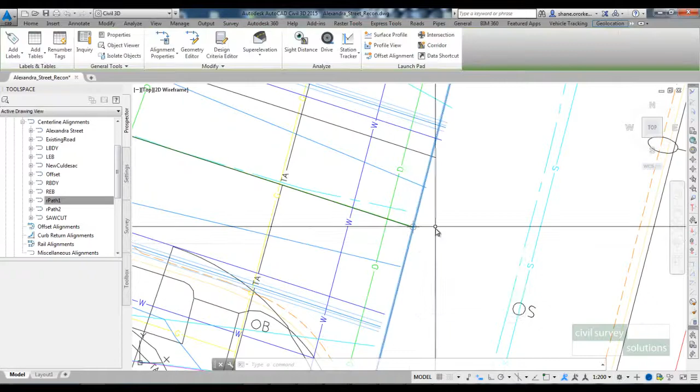The next thing I'm going to do is tie Alexandra Street back into this existing road. I won't be reconstructing the existing road, but we will tie back in at the curb returns. What I've done is I've created an alignment that runs along the edge of the existing road, and I've called this alignment existing road. You'll notice in the description I've got an R dash there. I'm actually going to treat this as a road object, and the reason for that is I'll be able to use the auto curb return command to form the curb returns for me.

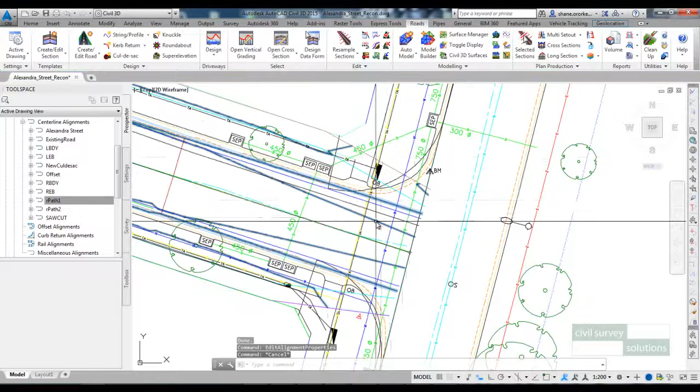First thing I'm going to do is open up the template editor, and I'm going to create a new template, and I'm going to call this one existing. I'm going to select on create section and add an LEB and an REB code, which will just be, at this stage, just a centimeter off the center line.

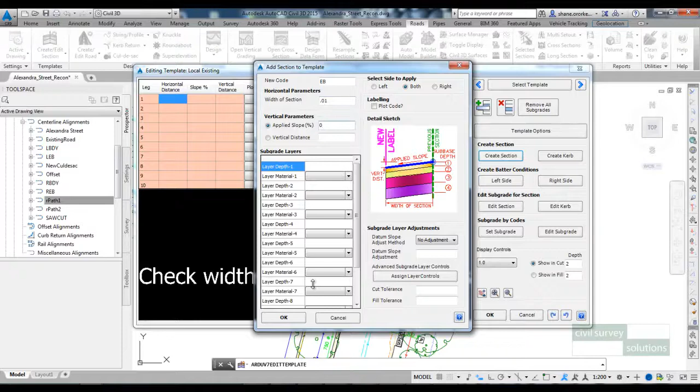It is important when forming intersections that you have both an LEB and an REB code. So although at this T intersection there would be no need for the REB code, I still need to put it in there when forming the intersection. So I've got an LEB and an REB code there.

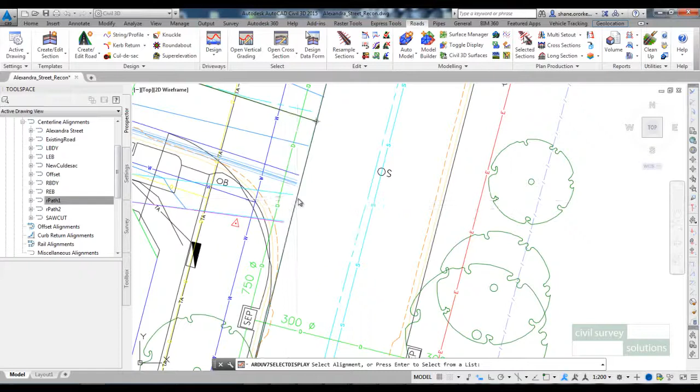I'm going to run the create edit road command and create the road object for existing road. I'll pick the template that I just created and I will select OK.

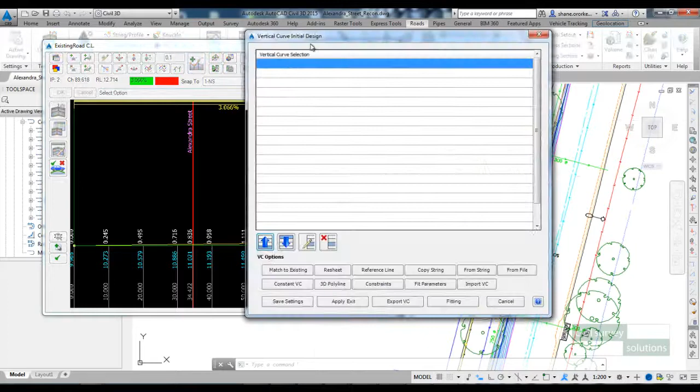So I'm just running off the surface there, so what I should do is match all the levels of this existing edge down to the surface. I'll run the match existing command and match that down to NS. Click OK, apply and exit.

Okay, so those levels are running along the existing at the moment. The next step for me is to tie in or add the curb returns in.

If I open up the vertical grading for Alexandra Street, you'll notice that, I'll just reset the levels there, you'll notice that the auto ease is still on. If I go and delete that IP, you see that it just comes back. I need to turn that off if I'm going to transition back in.

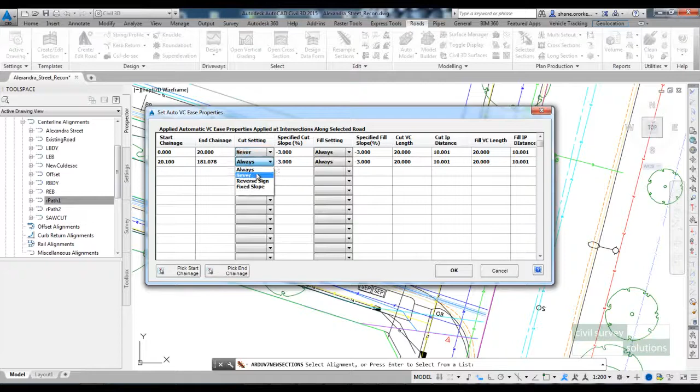So the easiest way to do that is to run the resample sections command. Select on set auto VC ease and set the setting from always to never.

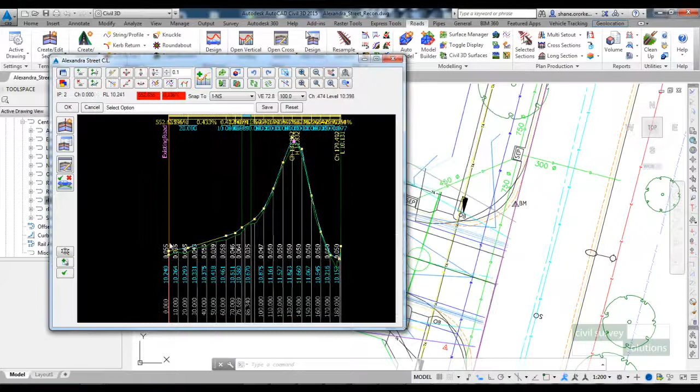Click OK. So if I open up the vertical grading now, that auto ease is off. I'll just rerun that resheet again that I had created from before. But I've now got control over the transition from my overlay back into the edge here.

So next step is to add the curb returns in. I can do that by using the automatic curb return command, and I'll just put it in at an 8 meter radius. Same on the other side.

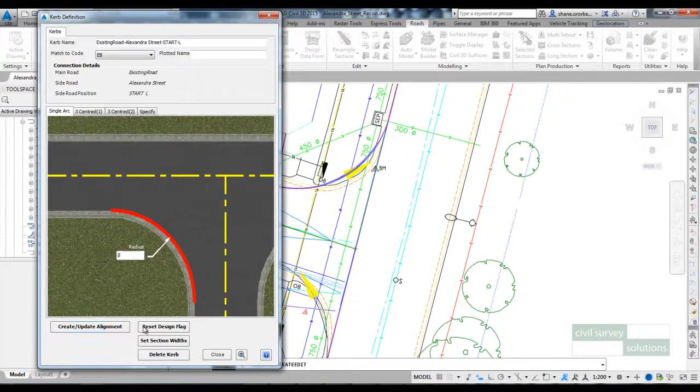And I'll just turn the mesh on so you can see what we've done there. Alright, so we haven't touched this existing road, but we have created a road object out of the edge, which has allowed us now to form the kerb returns.

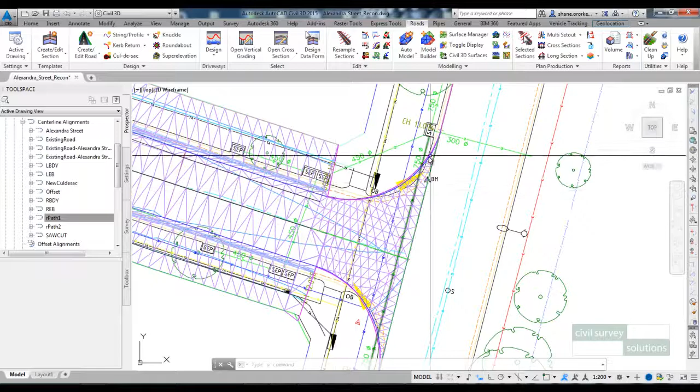If I want to tie the levels back into the existing road at the kerb returns, I can just open up the vertical grading editor for the kerb return and then do the design however I want for each of those.